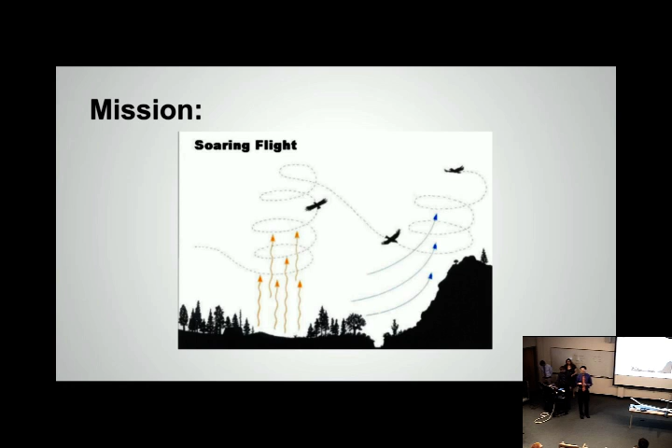In addition to the 4 mechanical senior engineers, we've greatly appreciated the help we've received from our professional sponsors, Leo Wilson and Michael Allen, who met with us regularly to assess our progress and offer suggestions. Both have been valuable to our process because of their relevant experience in the professional aviation industry. We've also highly appreciated our junior engineers who helped us over the course of the project: Alina Bylard, Martin Shen, Theodore Zirkel, Hector Gonzalez, and Ryan Parrish.

To complete our mission, we separated into two teams. One mechanically oriented team to create a light but strong enough vehicle to go and search for these thermals, and a second, more computer and electrically oriented team that will add the thermal soaring capability to the current autopilot system, which you'll hear from in the second half of tonight. Essentially, one team provides the brains and the other team provides the body.

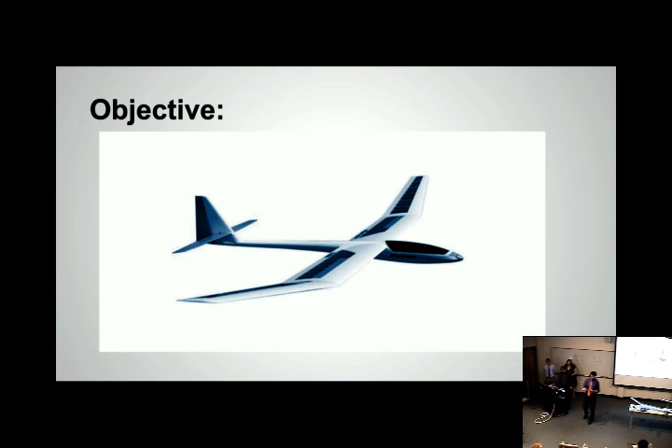There are four major design disciplines that must be considered in the design of an aircraft. There's aerodynamics, structures, propulsion, and stability and controls. Crystal was our aerodynamics engineer. Ashley designed our structures. Zach designed the propulsion, and I designed the stability and controls. Now we'll hear from Crystal about our iterative design process and the aerodynamic design discipline.

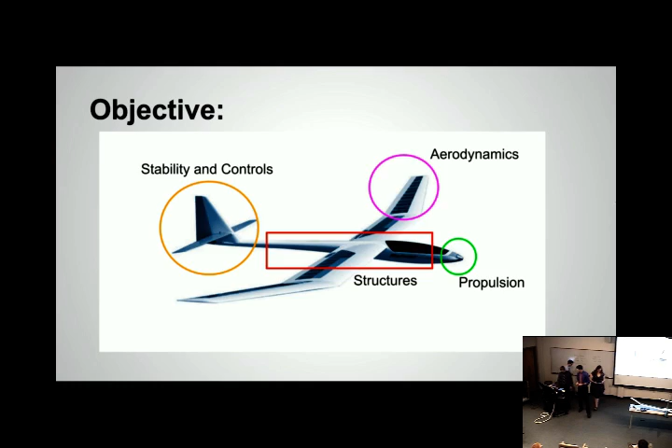When designing in the aerospace industry, it is critical that the four design disciplines communicate and work together throughout the entire process. Each design choice made has a profound impact on every other design discipline. As an example, if I was to change the wing design, this would impact and change the drag, which would change the required propulsion system.

And then once we've done some of our design, we come back and we collaborate and we come up with a new initial design. And then once we have our new design, we freeze it, and then we go and work on our individual design pieces, and then we come back and come up with a new design, and then we freeze it, and we keep going through this process until we're ready to build. So this is very iterative, as you can see.

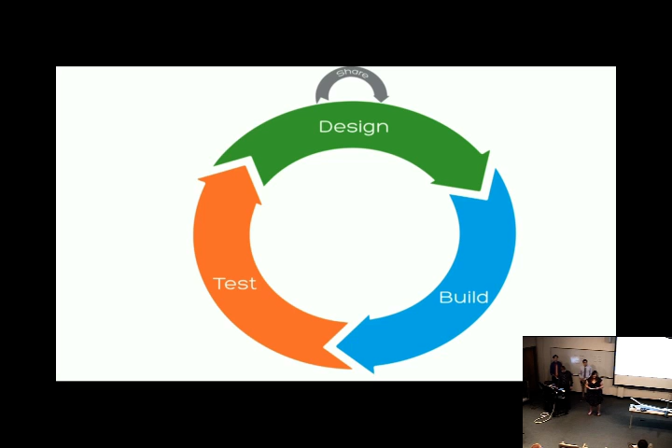Our team jumped in with a baseline design that was adapted from competitors. This allowed us to work on our preliminary design. We then came back together to build and fly the aircraft. We gathered data from flight testing, which we will reflect on and analyze to come up with our second design iteration.

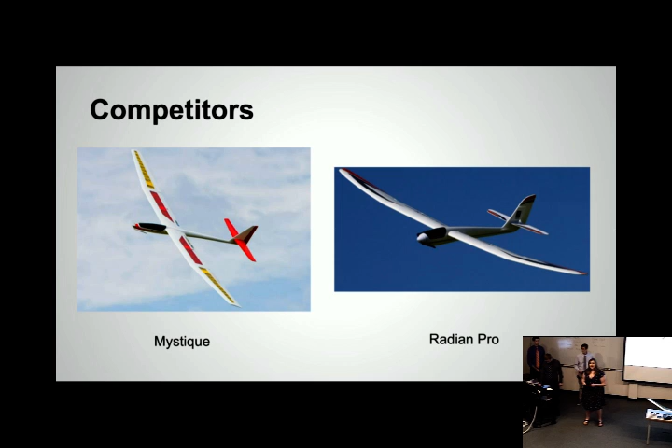So I started my aerodynamics design by researching competitors that had similar wingspan and missions as our plane. I chose an area and aspect ratio from the Mystique glider shown on the left. This allowed me to estimate a flight velocity and a Reynolds number so that I could then select the airfoil.

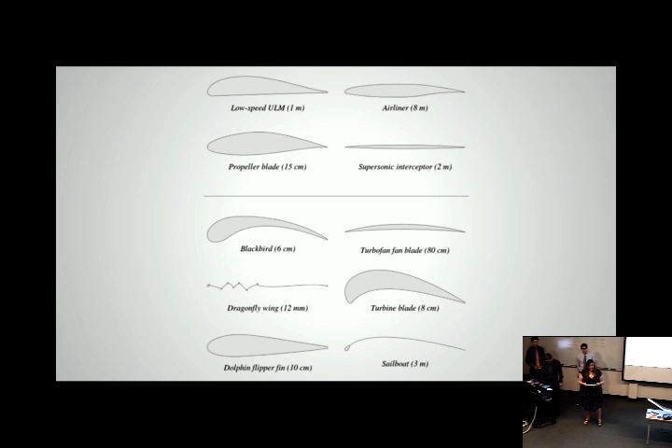We typically fly at a lift coefficient of about 0.6, but during takeoff and landing, our lift coefficient is going to be much higher. I chose the SA7038 airfoil, which is the blue one on the top, because it performed well at our target lift coefficient of 0.6, and it also had a very high maximum lift coefficient of 1.3 for relatively low drag coefficients. I chose the tail airfoil by the same process.

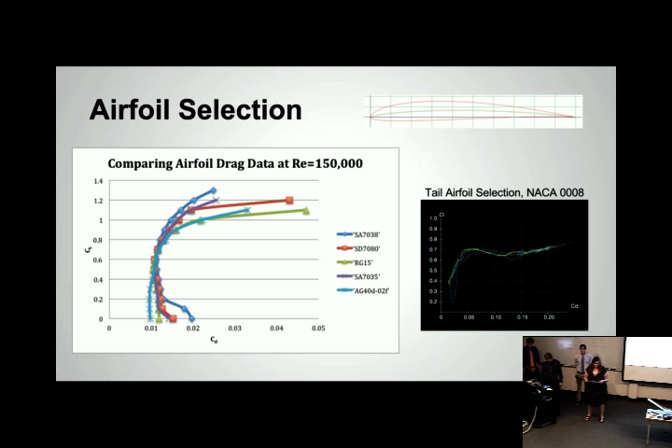So that was all two-dimensional design of the wing. Now we're going to move into the 3D size and layout. Because our mission was to produce a glider, I chose a wing shape that was long and skinny, meaning that it has a high aspect ratio. We can see this in nature, like the albatross. It also has a very high aspect ratio.

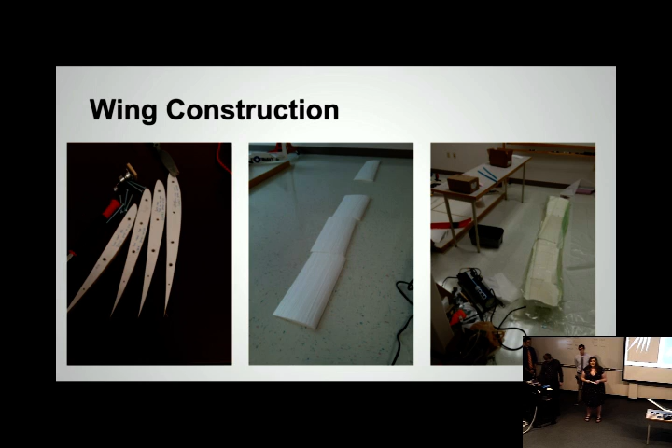So we started our wing construction by making airfoil templates that we could then cut out, so that we could cut out our foam wings using a hot wiring technique. Foam pieces were cut to length, and then the airfoil shape was cut out. A carbon spar was installed at quarter chord, and fiberglass and resin was added to the wing, and then it was placed in a vacuum bag for 24 hours. Ashley is going to expand on this hot wiring technique and vacuum bagging technique in a minute.

After it came out of the vacuum bag, the wing looked a little rough, and so we had to do some sanding and a couple patch jobs. And after we did that, we cut out our control surfaces, and we installed our servos and our control rods. And then we were pretty much ready to paint. Brendan will expand on some of that control surface stuff later on. Ashley will now discuss the structures and construction of our airplane.

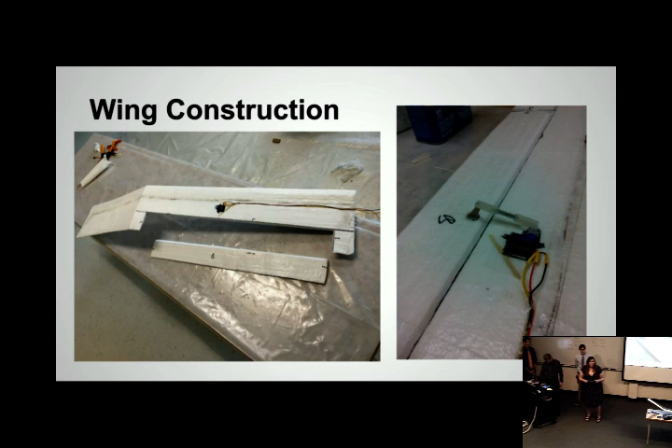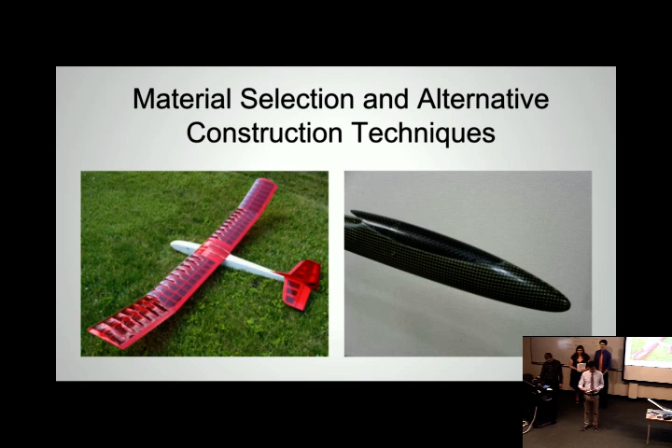The first iteration process, from a structural standpoint, was focused on the manufacturing techniques. And so we simply purchased commercially available carbon rods that we knew would meet our requirements. Beam stress analysis showed that our maximum stress in the carbon rod was well below yield. And for our application, it was sufficient to say that our stress came purely from bending. Our second iteration process is based on refining our design based on stress and deflection data that is collected during our first iteration.

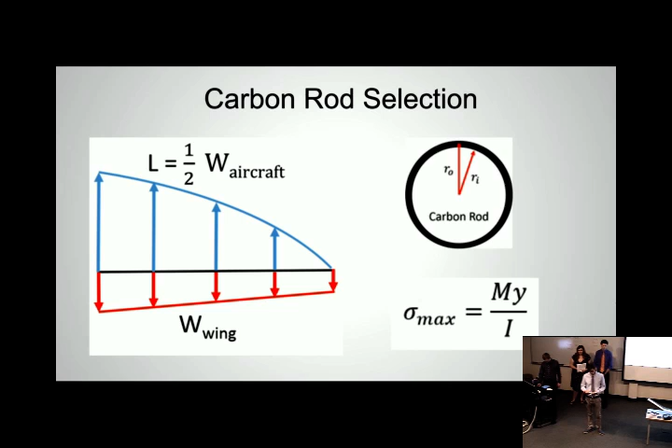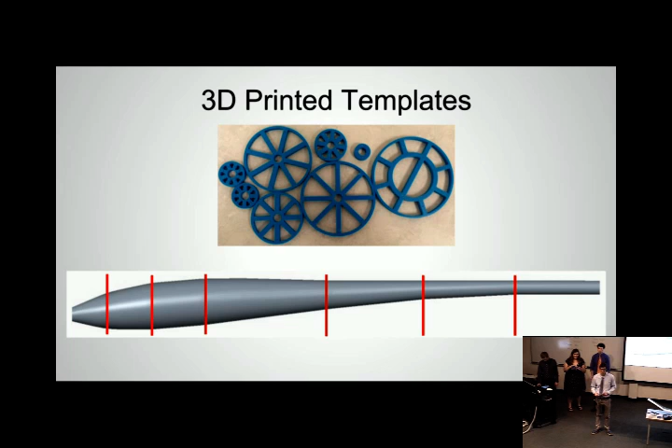My construction focus was the fuselage. I started out the design with this sketch, and from that sketch I created a model of the fuselage in Creo. I then sliced it up at each of these cross sections shown above, and 3D printed templates at each section. The templates are used to turn my design into a reality using foam. They ensure that the foam fuselage is the shape that I initially designed it to be. The Creo model allowed me to find valuable data such as surface area, and using my MATLAB geometry code, I calculated the weight, which is used by the other three disciplines.

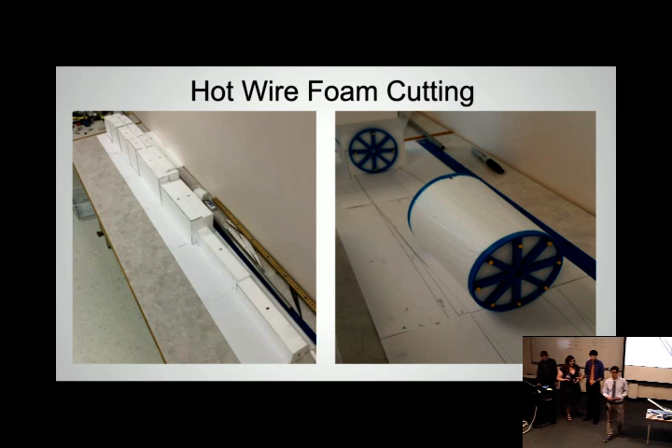I cut foam segments to length and then used the templates to shape the foam using hot wire. This technique uses current to heat wire that's passed along the surface of the template, and it leaves just the foam behind that is in between these templates. After gluing the foam segments together, I did a fiberglass layup on the exterior. This process involves saturating fiberglass with resin and then laying it on the desired surface.

Coming back to the bending stress that I spoke about at the beginning, those stresses that were calculated were sufficient during steady level flight, but we need to consider gusts and maneuvers, which both create additional stresses on the aircraft. For the sake of time, I'll briefly discuss gust load factors. These are very applicable since the thermals that we are dealing with are simply gusts of hot air that can have velocities up to 5 meters per second. This is represented as the V gust and causes the aircraft to experience a relative velocity and an additional angle of attack.

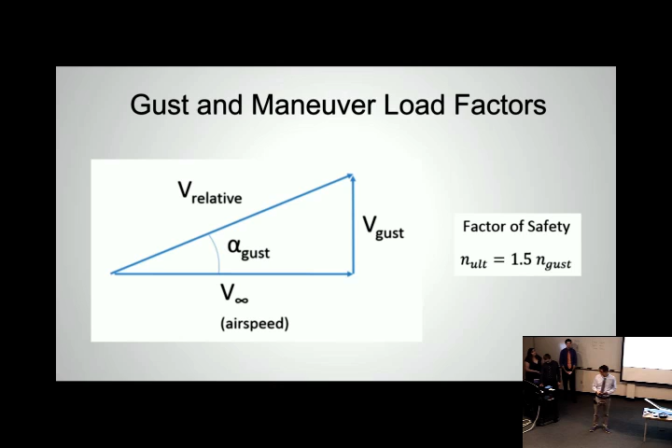Knowing this angle enables us to calculate the additional coefficient of lift and in turn the additional lift on the aircraft. This increases the applied moment and results in increased stress. From these load factors, we can also determine the factor of safety for our aircraft. Next, we'll hear from Brendan about the stability and control of the aircraft.

In order to begin our iterative design process for the stability and controls, I started by considering different tail configurations. I found that most commonly gliders used a conventional tail configuration or a T-tail configuration. The T-tail positions the horizontal stabilizer out of the wake of the main wing, which increases the efficiency. However, they require more structure to support the added moment forces and can enter deep stalls that are difficult to recover from. Because we wanted the lightest design and that is most simple to manufacture, we selected a conventional tail

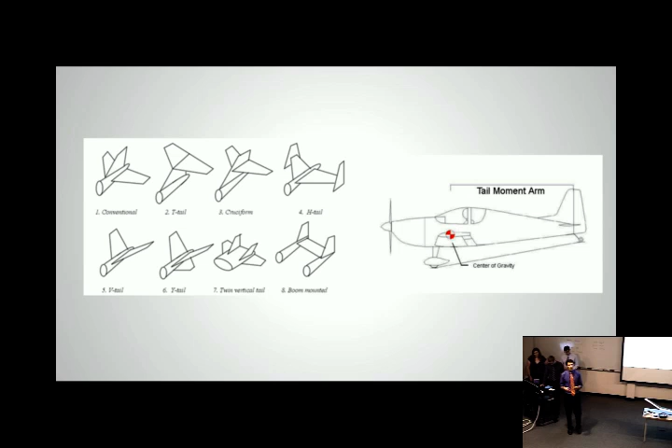configuration. Then I researched what length to make the tail moment arm to integrate that into my tail surface design MATLAB code. There are many design details to consider in this project, but because of the importance of longitudinal or pitch stability, I would like to highlight this process. Its three components are horizontal tail sizing, the angle of incidence of the horizontal tail, and the center of gravity location.

Conventional configuration aircraft require the center of gravity to be just in front of the center of lift. This is counteracted by a downforce at the tail from its downward angle of attack. My design process began with MATLAB to size the tail based on parameters such as our wingspan and tail moment arm. These areas are critical to ensure static stability. The original design went through several design iterations because of manufacturing issues where the trailing edge of the surface would be melted away by the hot wire technique.

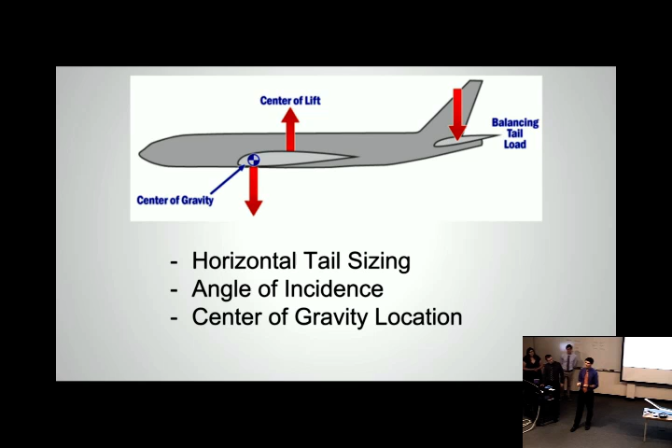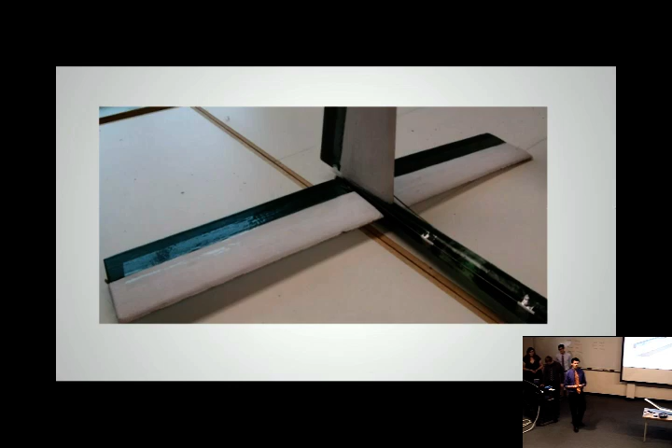Next, I needed to find the angle of incidence that the horizontal tail would be mounted at. To do this, I used XFLR5 to plot the lift versus angle of attack of our NACA airfoil. From the required downforce shown on the vertical axis, I selected the angle of the tail to achieve the downforce required to balance the plane.

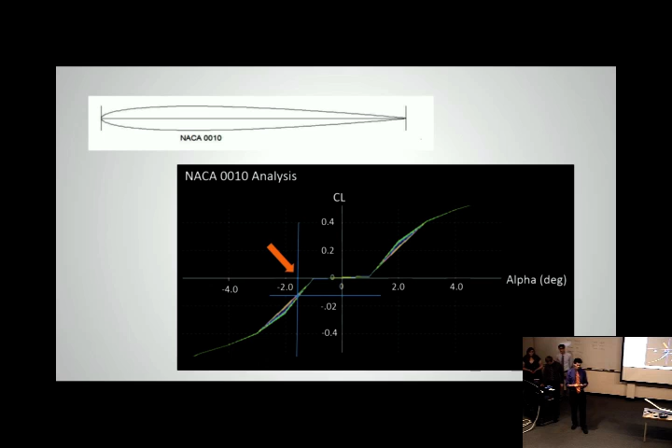Continuing to use MATLAB, I calculated the aerodynamic neutral point and the center of gravity. From there, I could calculate the moment generated by all the weights and moment arms, giving me the pitch moment force. At the time of design, I found that I expected to have more flexibility in the component placement. However, the as-built aircraft showed that there were certain differences, like extra resin composite in the tail that threw off my moment calculations. We'll consider this in the second design iteration, but for the moment we corrected it by adding extra ballast to the nose.

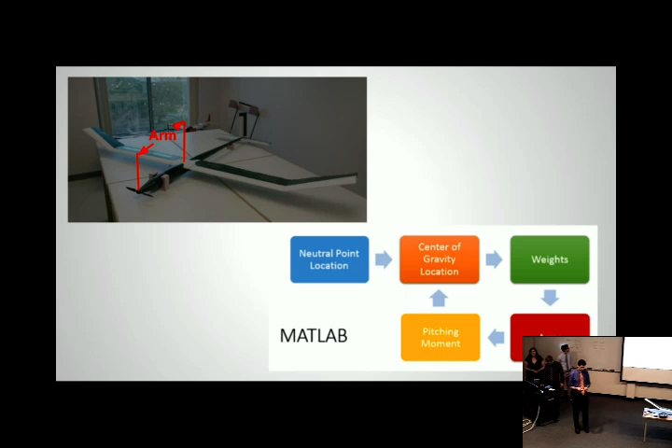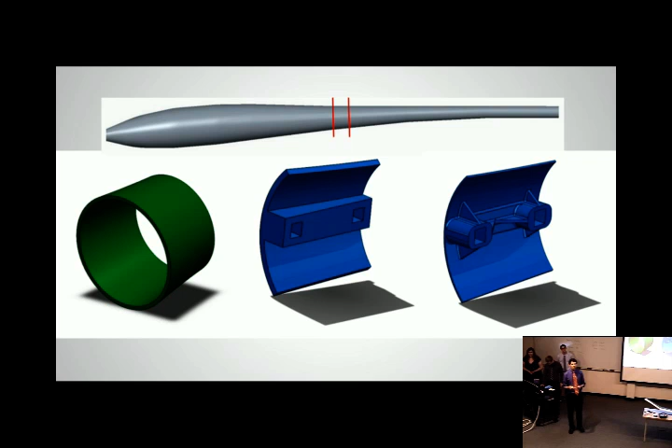We decided that our tail servos should be mounted inside the fuselage in order to reduce drag. Thus, I needed a way to mount our servos. I designed this 3D printed servo mount in SolidWorks by incorporating the three-dimensional shape of the fuselage so it would fit into position well. I made several design iterations to reduce weight. Here is the functional 3D printed part installed on the aircraft. Now Zach will share with you the propulsion discipline and some of his original part designs.

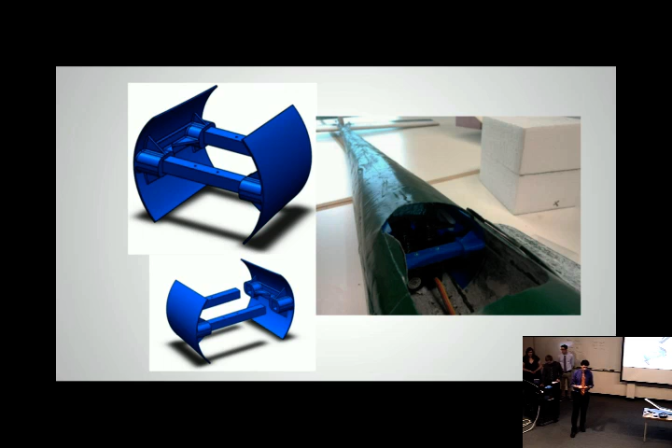So as a propulsion expert, my job was to get the aircraft to the thermals. How are we going to get the aircraft to the thermals? Well, since we want a lightweight aircraft, the best way to do that is with a small motor. We don't want to do a winch launch aircraft because that would create a much heavier aircraft.

So we start with a prop that gives us the proper amount of thrust, and then I would determine which motor would give us the correct RPM and power consumption to supply the proper amount of torque for the prop. Then find an ESC that would match that and a battery that would match that. This is an iterative process, and during the second iteration, I was able to reduce the overall system weight by 110 grams, which is about 8% of the overall aircraft weight.

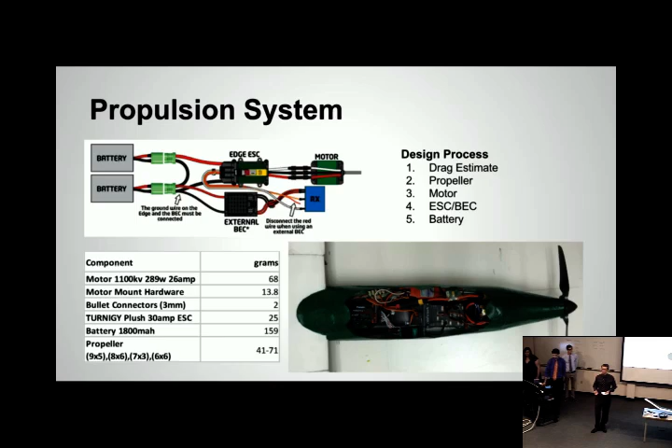One of the components I needed to make to integrate the system was the motor mount. The fuselage is hollow, it's round, there's nothing to mount to, so we needed some way of having a solid mount for the motor.

So I designed a 3D part to put the motor on. The problem was that since we dissolved the foam out of the fuselage during the building process, our inside diameter was actually smaller than we expected, and we also had a slightly different cut on the nose length. So this meant that I had to do this in 2 iterations to get a proper part. In the second iteration, I was able to change the shape of the part to bring it closer to the nose to reduce weight.

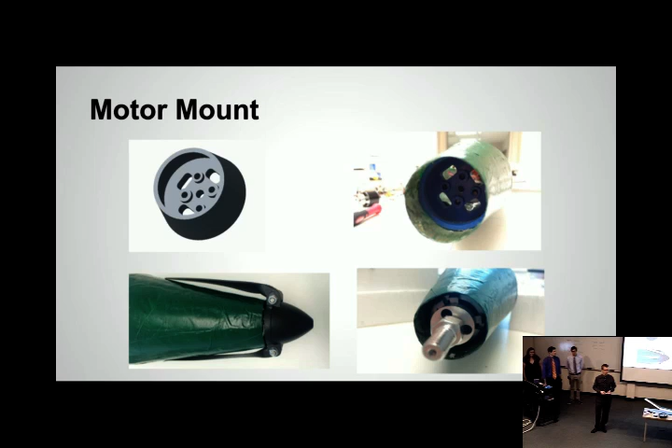Once I had this part, I then could work on the folding prop. To integrate the folding prop, I needed to create a prop adapter. Most props use a standard hub, but they are fixed. They don't have a special hub that folds back. To incorporate this special hub, I needed to create an adapter that had a collet on it. So I went back and looked at this part, figured out what design characteristics from it I could take, and then which ones I needed to change.

Then I created a 3D model of this and went to the lathe and started to machine the part. After this, I was able to take 2D coordinates and place the part on the mill and properly drill each hole in the proper location so that it would correctly match the motor.

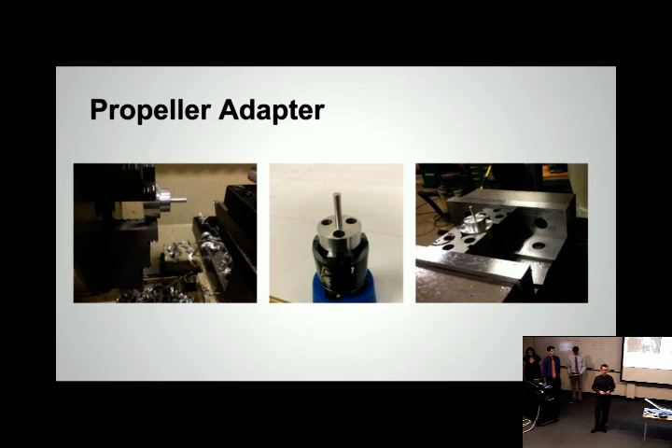Next, I would like to talk to you guys about the prop testing. Prop analysis can be very complicated, so one of the best ways to actually get a good estimate of what thrust you're going to get is to actually go out and test it. So I performed a number of static thrust tests on our propulsion thrust stand. This gave me the efficiency of the prop, the maximum thrust that the prop can give me, and how linear the thrust to power was.

Since the thrust was linear, I was able to make a fairly linear fit with that and send that to my model to determine what my flight time was in MATLAB. And then that way I could make the best decision on what battery to select. But the problem with this is that it is static thrust, but our aircraft's actually moving. So to do final testing, we need to start our flight testing. This would give us the actual motor's prop performance during movement.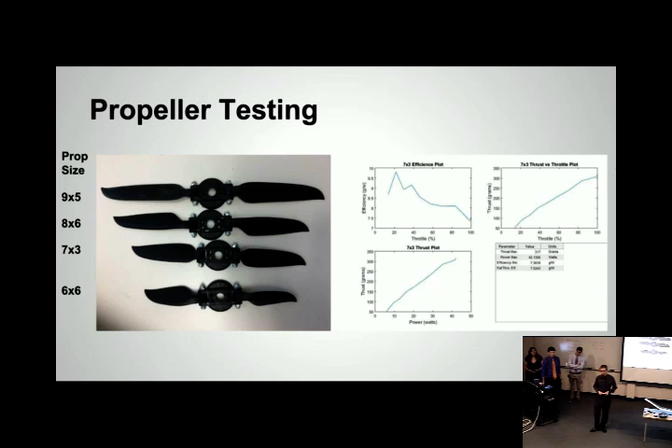In our flight testing, the first thing we need to do is create a checklist before flight. What do we need to know before we fly? Are all of our batteries charged? Is there any structural damage from past flights? Do our control surfaces actuate properly? Just as we would in a real aircraft, to protect our investment and to have the smoothest operation.

Each member created a plan for their set of flights they wanted me as the pilot to perform. So for example, me as the propulsion expert, I was interested in the flight time, was my battery properly sized, and how well does the aircraft climb? Did I have enough power to get the aircraft up to the thermals? Brennan would be interested in how stable is the aircraft? Did we get the control we wanted? Could we maneuver around the thermals the way we intended?

Aerodynamics wants to know how the wing performed. Did it glide properly? Did we get proper soaring with the aircraft? Structures wants to know, well, how much force is the aircraft taking? What's the maximum turn we can perform on the aircraft? Is it going to be strong enough? Are we going to have any structural issues?

Next, I'll show you guys a video from some of our test flying. This is from our 5th test flight, but you should have seen our first one. We ended up hitting the back of Brendan's head with the tail, and we didn't actually include a safety factor for that, so we did have to make some repairs. But you can see we've repaired it. The fiberglass is very easy to repair, so we were able to do that.

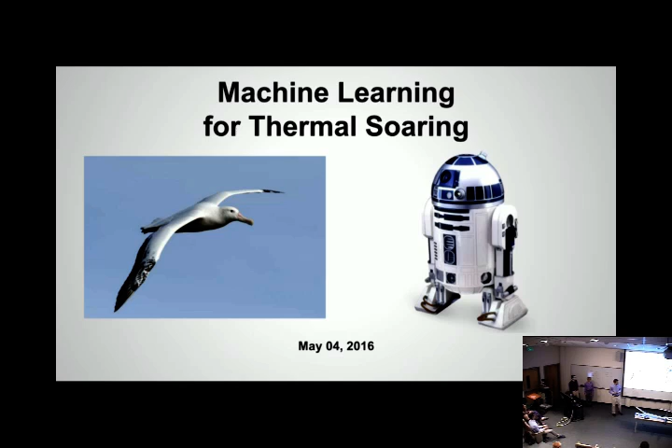Our team consisted of us 3 seniors, and we also had some underclassmen helping us, Robert Berglund and Jeremy Gaines. They're sitting right there, so thank you guys. And Professor Sterling was our advisor. So what do we want to do? We want to do the same thing that we were talking about earlier. We want to be able to soar in thermals.

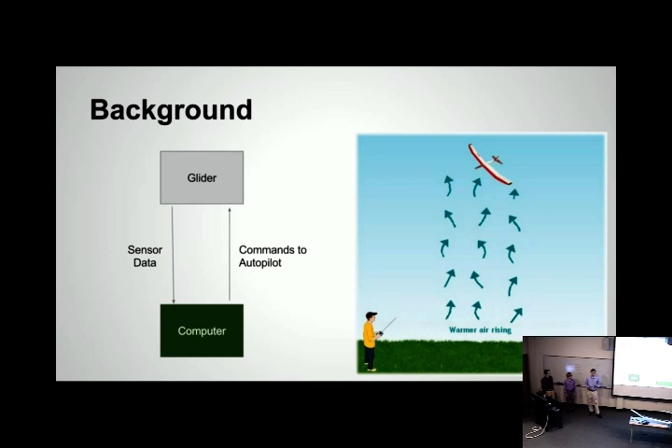However, we want to take Zach out of the picture. We want to basically replace Zach, so you don't have to have someone manually trying to fly through all these thermals. So we want to have the glider come down, send us a lot of data. We process that data, figure out where the thermals actually are, and send commands back to the autopilot to tell it where to go.

So my goal in this project was to provide us with a base implementation we could compare against. So I used existing research. One of our sponsors, Michael Allen, actually did significant research on this with NASA, and we implemented a basic algorithm to compare to. The first step of that was to make an energy equation, which thankfully was already well researched.

And this basically gives us an idea of what the energy is like in the air. Essentially, we're flying, gathering our data, and we want to know as much as possible, and we want to process that to know when we suddenly get some lift. So when you graph this energy equation as we're flying along in simulation, you can see that it goes along, and then suddenly I hit a thermal.

Boom, it spikes. And when that spike comes, that differential, that's when I latch onto the thermal. And my simple little algorithm says, hey, there's a spike, great, I'm in a thermal, I'm going to latch on and ride this thing until it goes away. And then when it goes away, it goes on with its mission.

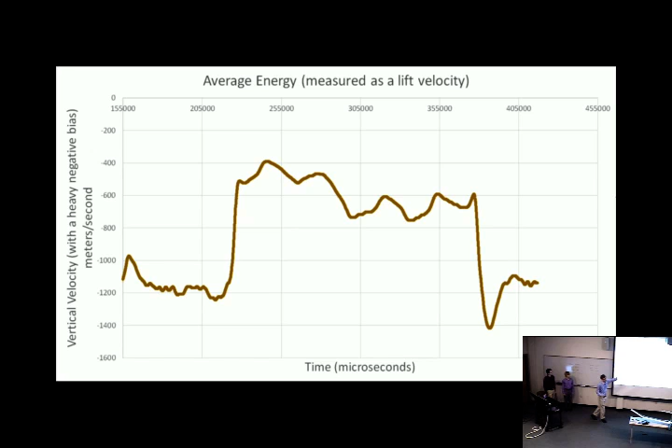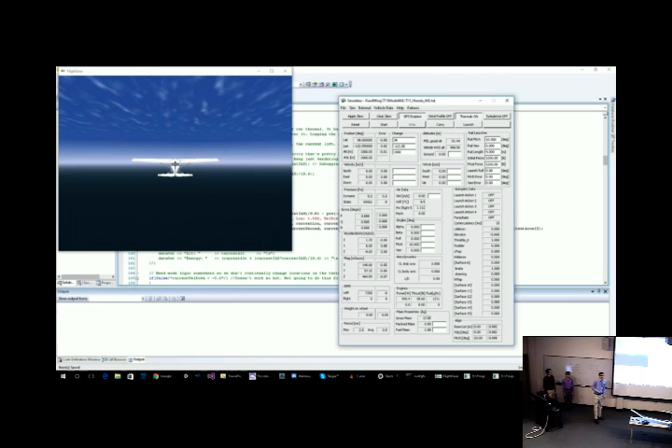So this is where I create the thermal. This is where I set up my plane. I can toss it up to 1,000 meters with a little click of a button. It's great. We can't do that in real life. And then I have some C++ code behind it. And then this is my other view. This is the Piccolo simulator that I'm using here.

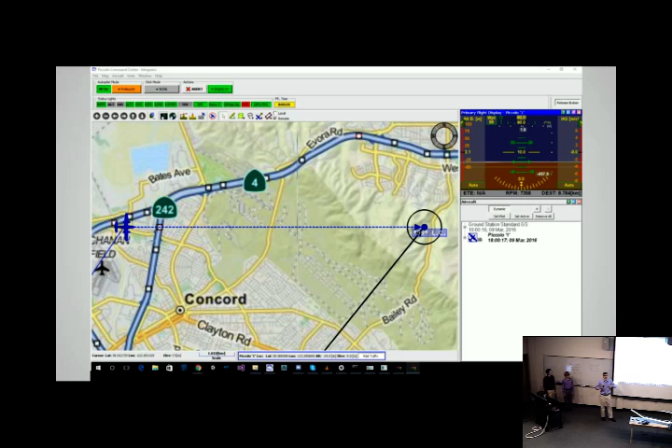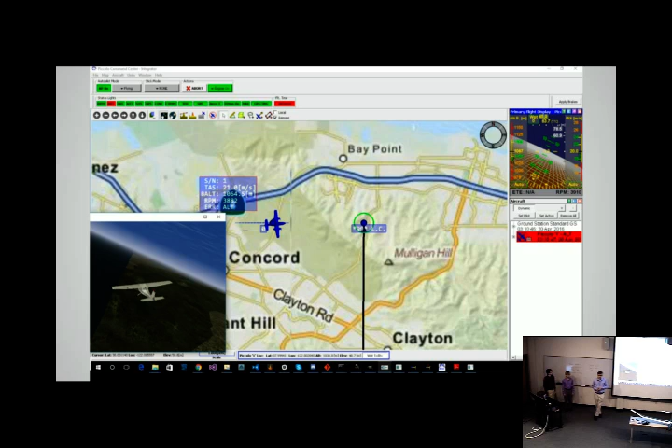And here I have my plane set up. I'm going towards the destination. And in the middle, I've hidden a thermal somewhere. And basically, I'm trying to see if I can find that thermal. Thankfully, right in the middle, I found it. And I set a waypoint there, and then you can see my plane has started orbiting that thermal. And if you were watching the simulation, you could see that the altitude was slowly rising as I followed that perfect thermal.

So what next? This sounds great, and it does work, in simulation at least. It's been working fine. We're working on the rest. But the disadvantage of this approach, one is it's very simple soaring logic. Basically, I just latch if I'm getting lift. I don't really have a "this isn't great, I'm going to move on to another thermal." I'm just getting lift, sweet, I'm going to stay here until it goes away.

And then we don't really know what the thermal truly looks like. Currently, I'm just using a very basic latching method, similar to Allen's centroid method, where basically he's trying to estimate where the center of the thermal is at all points. But we don't really know what the thermal looks like, and that has a bunch of different issues with it. So that's where Garrett and David come in. So enter Garrett and David, and they'll be talking about some more improvements we can make to this algorithm.

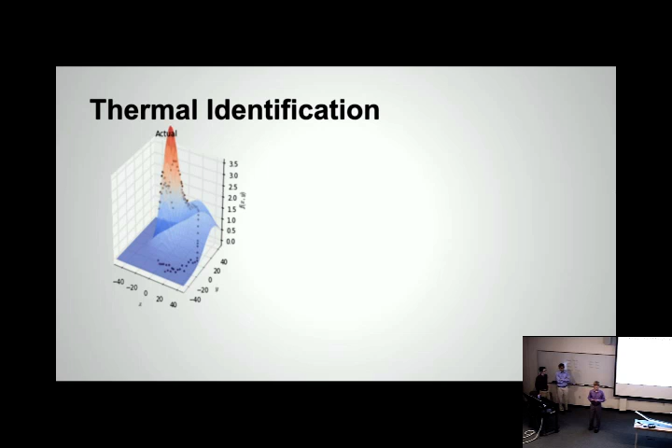And from that limited information, we want to get an idea of what the thermal looks like so we can go toward the region with the highest vertical velocity and stay within that upward vertical velocity so that we can stay up in the air longer. I looked at a couple different approaches that we could use to take this data and figure out what the thermal looks like. The first is Bayesian parameter estimation.

This model on the left has 3 different parameters: the center location, the maximum upward velocity at that center location, and then this fall off. So how quickly is it going from high max vertical velocity to 0 vertical velocity?

But this requires that we have a model. If we don't have a model, we could try something like Gaussian process regression, which is a model-less approach. Basically, it takes the same data points that we ran through Bayesian parameter estimation, but it interpolates between them and extrapolates beyond them to make predictions about the vertical velocity everywhere, including the points we put in, but also everywhere else. But this is an unrealistic thermal model.

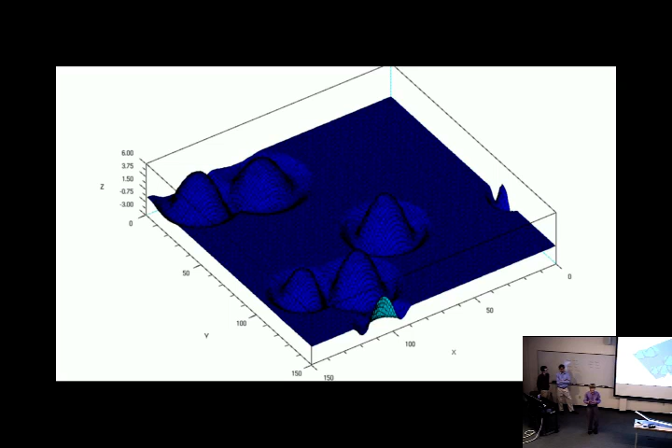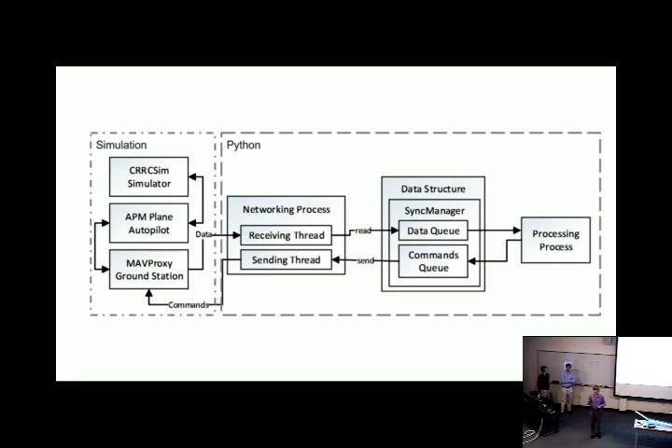But now we need to run this thing in real time in the simulator. So the simulator shown here on the left, I grab data from that in my Python code. I do a bunch of processing with the Gaussian process regression, and then I come up with commands to send back to the autopilot where it'll then tell the plane what to do. And here's the result. Similar to Travis's, but using my attempted improvement instead of the centroid method.

So in comparison with the centroid method, this is an improvement in that we don't just have one point, the center point. We have an idea of what the entire thermal looks like. So now, David will be sharing how he looked at improving another aspect of the thermal soaring.

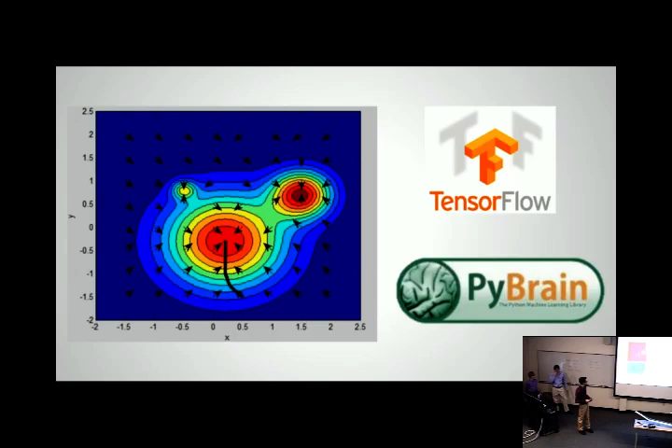So I started out doing some stuff in MATLAB and toyed with TensorFlow for a while. I eventually settled on a Python library, which is open source and called PyBrain. So PyBrain is great, but it's not really documented that well. And I didn't actually know Python at the start of this project. So there was a lot of me messing around with stuff.

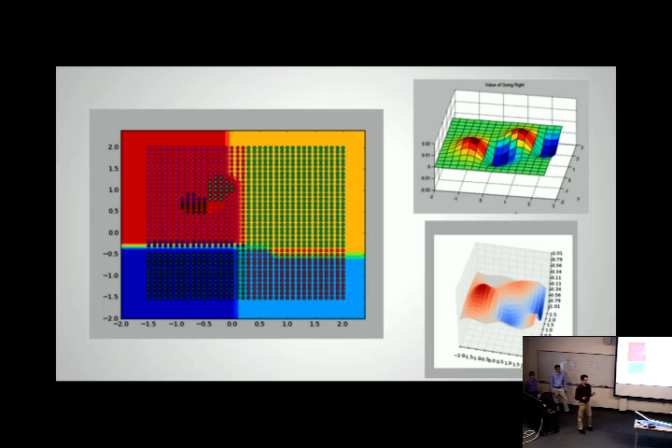So you can see here I'm trying out some classification. On the right, I'm trying out some regression stuff. I also did a lot of digging around the source code and seeing what object inherits from what and how everything all really stitches together. Once I had some idea of how that worked, then I was able to make a very, very, very basic solution. So you see this blue line is straight and it goes down. It is a very happy thing.

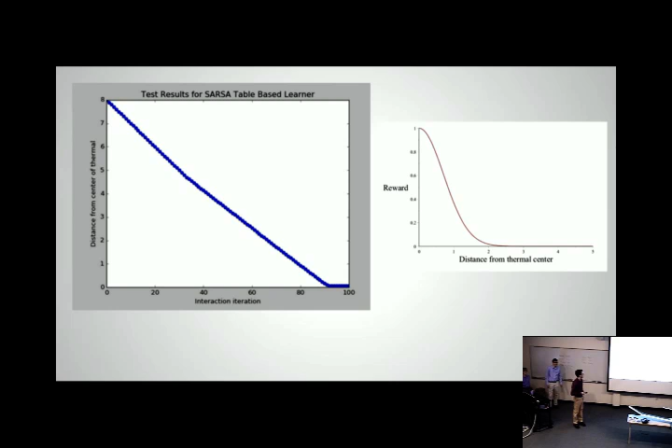Basically means I told it that there's a lot of reward on the left and not very much a long ways away from the thermal. And it learned, well, I should go towards the reward, not away. Which you'd be surprised how hard it is to get it to do that. Anyways, so that was good. But I realized that this method is not really all that practical.

The basic idea is, if in this state we do such and such, and in this state we want to do such and such, then the neural network can kind of guess in between what would be a good idea to do. So we don't have to store as much stuff. So unfortunately, it didn't really seem to work. It decided let's oscillate towards and away from the reward. And let's run away from the reward, like we're scared. So many weeks of debugging ensued.

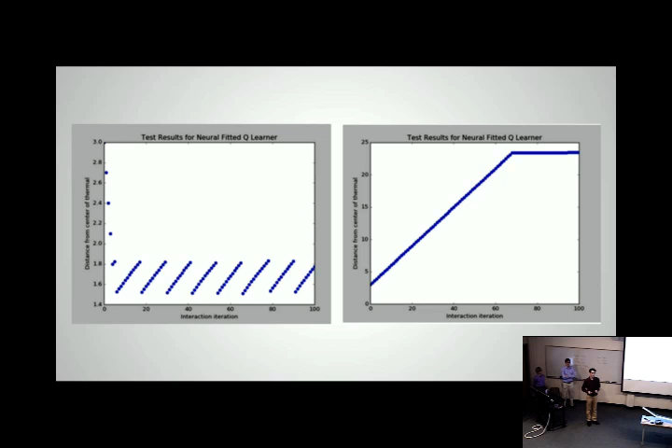I still think this method called neural fitted Q-learning has a lot of promise. And there's a number of problems with it right now, but I realized gradually that a really key problem with this is that it's not incorporating the model information that we have. Garrett's been developing this wonderful model of what the world looks like, and it's just not using this information here. So I switched to a method which is called dynamic programming, and it is still developing a policy, but now it's using our model information. And this allows it to converge a lot faster.

So now we have three basic components. We have a basic implementation, we have some great thermal identification methods and modeling, and we also have a policy that's starting to take place of what to actually do in these thermal situations. So now we want to combine all these components together.

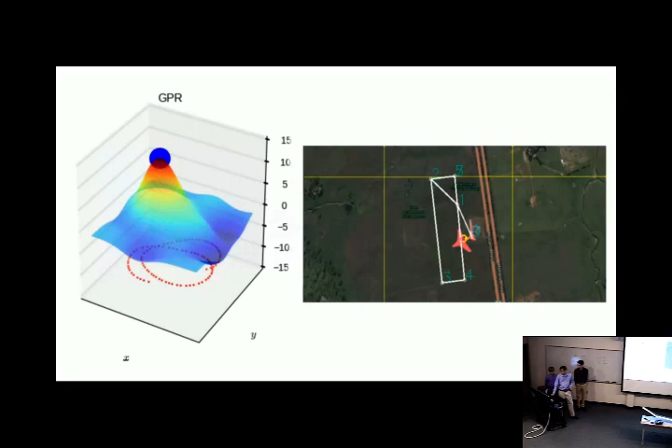I had a question, sorry. Wondering if we could go back to one of Garrett's slides. Quite a lot of data in those pictures, and you hit the highlights, but I'm wondering if you could share some of the details. Looking in particular at some of those red points, what those represent and where those come from.

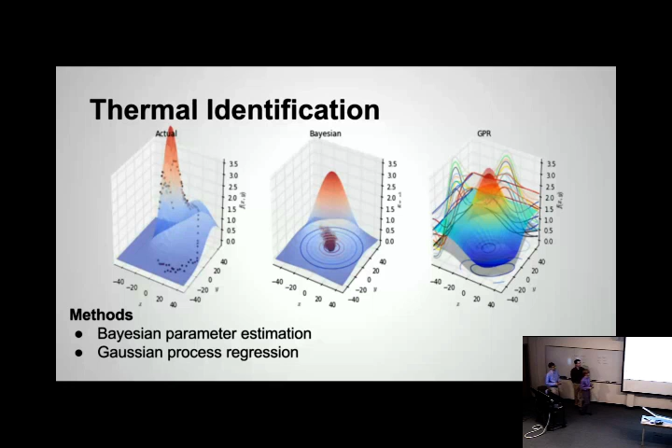So the idea here is these are all probabilistic approaches. It's coming up with a probability distribution over where the center of the thermal may be. So it's not saying the thermal is at this point here, but it's most likely around that point.

And so the greater density of the red is the most likely location, based on sampling algorithms. The Gaussian process regression is a Gaussian distribution, but with the Bayesian parameter estimation, I'm approximating an arbitrary probability distribution, and those red points are individual samples from that distribution.

Is there a certain height at which it would be ideal for thermal soaring, or is it arbitrary? I think you mentioned before 200 meters was a good enough height where you could perform that. So that 200 meters was just what appeared to work in the simulator. I think Campbell said something about 600 feet would be a good starting point, but I haven't looked into that whole stuff.

And is that the height you would be shooting for, telling the plane to stay at that level, or does it go up to somewhere around there, fly until it hits a thermal, and then go above that as it's finding thermals? Most of the concerns with height are to make sure it doesn't go out of our view. Currently in this project, with the simulator, we can instantly teleport it around until it seems good. I was running at like 1,000 meters in my simulator, so it depends on where you put the thermal, really.

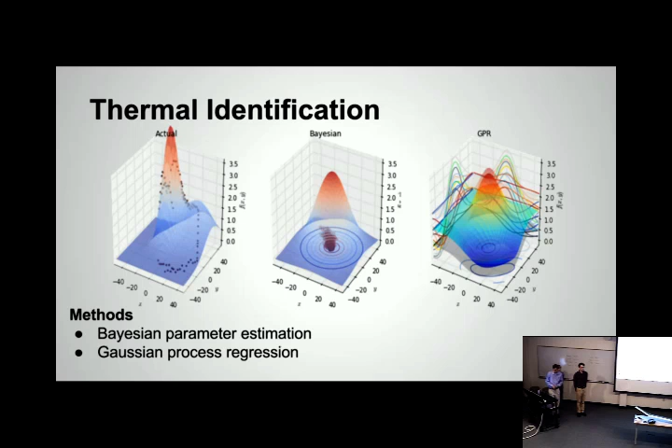So. A question for David. One of the last methods that you talked about was dynamic programming. And you mentioned that with dynamic programming, there's a policy network and a value network, and they had to interact with each other. Can you tell us a little bit more about that interaction, how they work together?

Yeah. Okay. I sort of was rushing through it a bit. But the value network keeps track of how good it is to be in different states. So like I was saying, if it's bad to be here and good to be there, then it really seems like I should be updating my policies so that I go there. So this arrow drawn from the value network to the policy network means that we're making the policy network greedy with respect to the value network. So that means everywhere we're going to make our policy such that it grabs the most reward it can.

Then the arrow coming back is maybe a little trickier to understand. Basically, if you change how you're interacting with the thermal, maybe you're heading towards the source of reward, and before you were just heading off into a place where there was no reward at all, then that's going to change the value of where you are right now. So based on smarter choices, that can really change the value of certain places. So that's how the arrow comes back. And then it just keeps doing that back and forth.

How are you guys planning for if there's legal issues with flying certain airspace or being too far away from your signal, or manual override kind of stuff? Yeah, so one of the things about at least the Piccolo autopilot, and Pixhawk as well, is that it has this auto switch off that will switch into manual control after certain parameters, boundaries, and also at any time you can flip the switch and go back into manual control. So that's in terms of it going out of control. On the other side of things, just being legally able to fly, I believe Zach has more information about that.

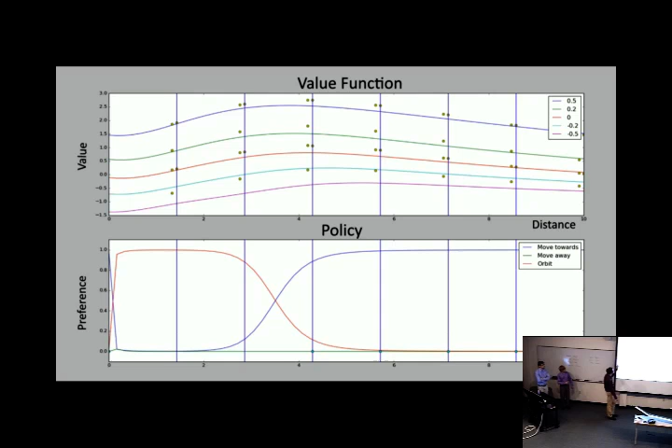My question's for David. Did you find that as you were training the computer, it ever came up with a good strategy that you had never thought of before? Well, it was working in such a simplified world that it was really hard for it to do that. It did manage once, though, that I remember. This here is graphing how far away we are from the center of the thermal. And once I started keeping track of which direction the airplane was facing, taking into account the real airplane can't really oscillate, it's kind of impractical.

I hadn't really realized that if it was right close to the thermal and decided to keep going forwards, all of a sudden now it's going away from the thermal. So in effect, without turning around, it has reversed its direction. So it managed to exploit that to do some weird stuff that I hadn't expected. But yeah, that can be a lot.

What's the maximum distance your plane can fly from your control unit? The current setup is not quite ideal with the antennas we have, so we'll fix that and check that before flying it. At the current setup, if it loses control, it'll just revert to manual, and Zach will have to bring it back. Basically, our ground station antenna is a lot shorter range than the manual control antenna, so that's kind of what we're relying on. Brendan, you want to add to that? I was just going to ask why would the manual antenna go farther than the computer?

I don't know if we know per se. Most of what we're going to be focused on has been simulation, and it's kind of just the default one they give you. I think currently we're using our wireless router antenna. So we couldn't find one that they used last year. So we found something that works, and we've been making very, very short flights currently. So that's something we'll be seeing.

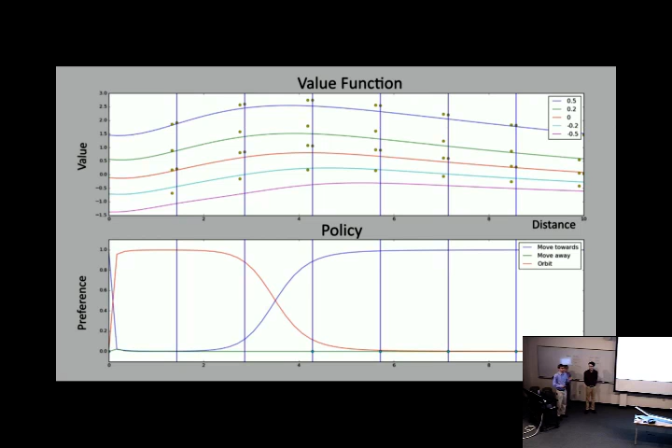Okay. Well, on the Piccolo, this is something again that we're going to get more into the stages of. On the Piccolo, we're currently sampling at 20 hertz, and we can pretty much process that data in time because I'm running it on my computer, which is pretty nice. And running on a laptop, at least I have a laptop in mind that should work pretty well. But that is actually definitely an issue.

I don't know exactly what the Pixhawk's latency is, but for example, we were going to originally use Bayesian parameter estimation, and Garrett was getting really worried because he put in some values and it'd take 4 minutes to come out with something, which is kind of scary. Currently, Gaussian process regression is being a lot faster. He's able to get pretty much real-time results. So we're pretty happy with that. But if we wanted to ever put it on the plane itself, then we might have serious issues.

Something I should add to that. I'm really unsure right now how much delay is going to be involved in my part. It could be that I can do a ton of training and simulation, and then when it's online, it just basically consults trained results. Or it could be that the simulation is just so different from the real world that it has to do a lot of learning online, in which case that could be a considerable delay. Somewhat.